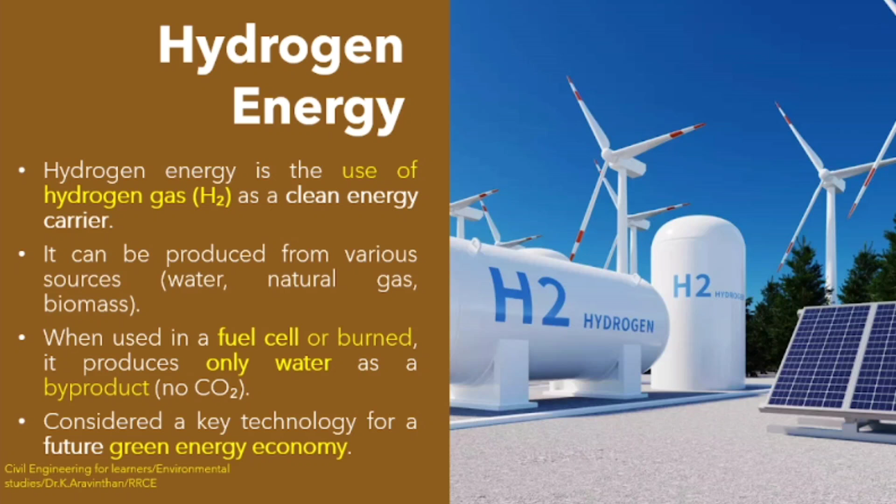From biomass also you can derive hydrogen. So you get hydrogen from water, from natural gas. Natural gas consists of methane. Gases are of different types, and methane gas is used for producing heat. Natural gas is derived from coal.

Petrol they derive, isn't it? They derive petrol, diesel, gas from coal. So those are called natural gas, derivatives from crude oil.

Now next thing is from biomass, which is biological waste, organic waste. From this process you can derive hydrogen. If you have diesel, you can run a vehicle, you can generate electricity using diesel generators. The same way, hydrogen is also a fuel. By this you can generate electricity, by this you can run a vehicle.

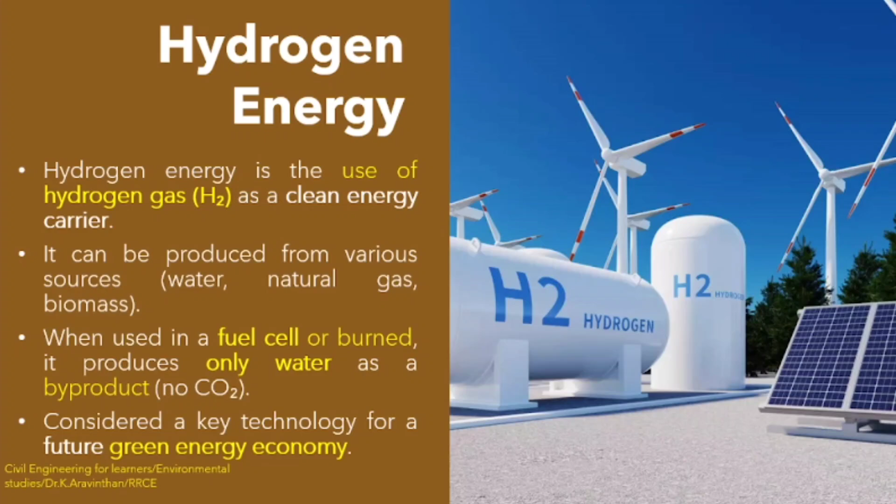Considering this key technology, sir, already we have diesel, we have petrol, we are generating electricity. So why are we going for hydrogen? This is called renewable energy. What is renewable energy? It will not deplete. Imagine diesel and petrol, we depend on coal. Hydrogen is not available readily.

Around you, earth consists of how much percentage of atmospheric components? Nitrogen, oxygen - these are the two things majorly earth consists of. Now if you go into space, what does space consist of? One is hydrogen, another is helium. These are two gases. 99% these two are there, only 1% is rest of the oxygen or matter, etc.

Universe completely consists of hydrogen and helium. That is why I am discussing hydrogen - this is abundantly available. Sun is burnt by using hydrogen energy, it converts hydrogen into helium. That is the process happening. Daily we are getting sunlight and heat due to that process. So hydrogen is abundantly available.

Now in universe, but on earth you don't have hydrogen, you have nitrogen, you have oxygen. You can tap hydrogen by renewable electricity, where you can generate hydrogen using solar panels, using windmills. You can generate electricity, and from that you have a component called electrolyzer. This is a process - there is water here. You have two conductors. If you pass current in this, at one part you will be having oxygen and at another part you will be getting hydrogen.

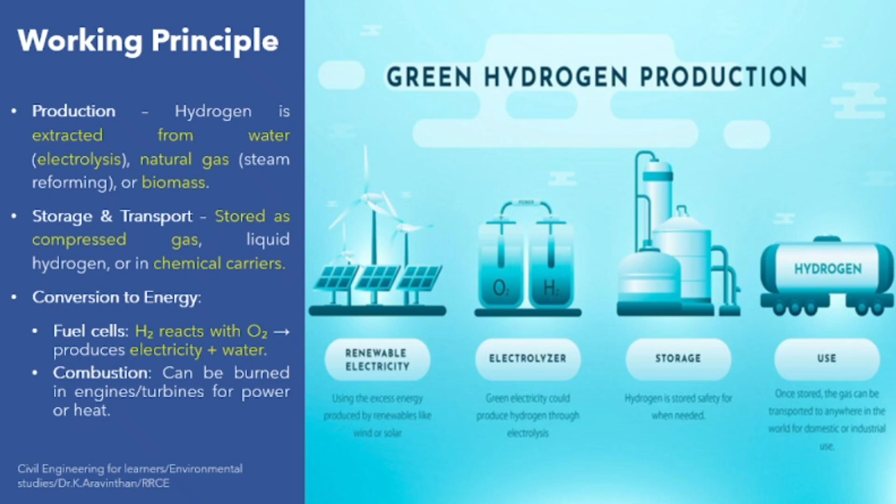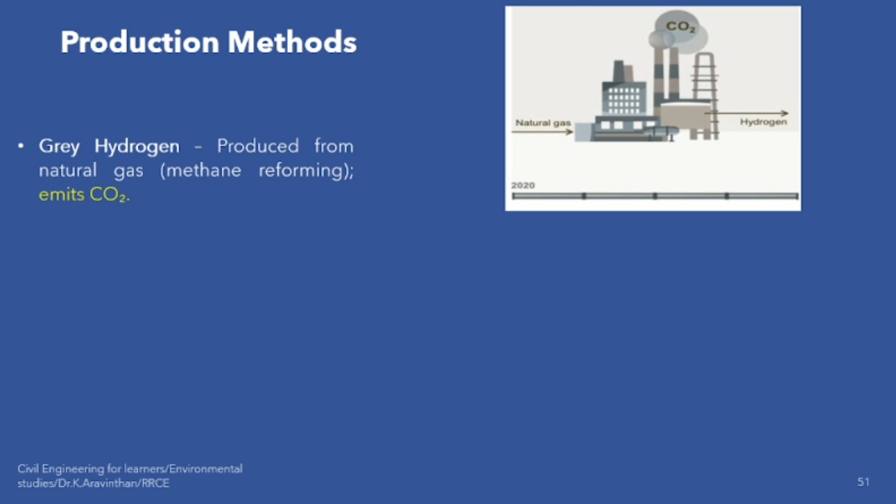Next type of hydrogen is called blue hydrogen. What do you mean by blue hydrogen is, they are similar to grey hydrogen, but what they will do is, while production of this hydrogen, some CO2 gases will emit. Those gases will be stored underground or deep inside the earth.

Next thing is called green hydrogen. What do you mean by green hydrogen is, you are getting it from electrolysis process - what I have told, from water you generate the hydrogen. From that you are generating some hydrogen, that is called green hydrogen. So there are three types of hydrogen.

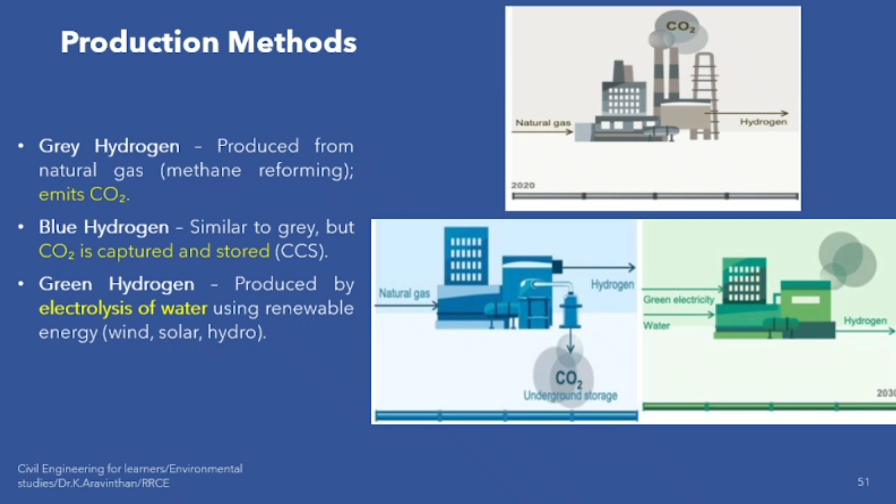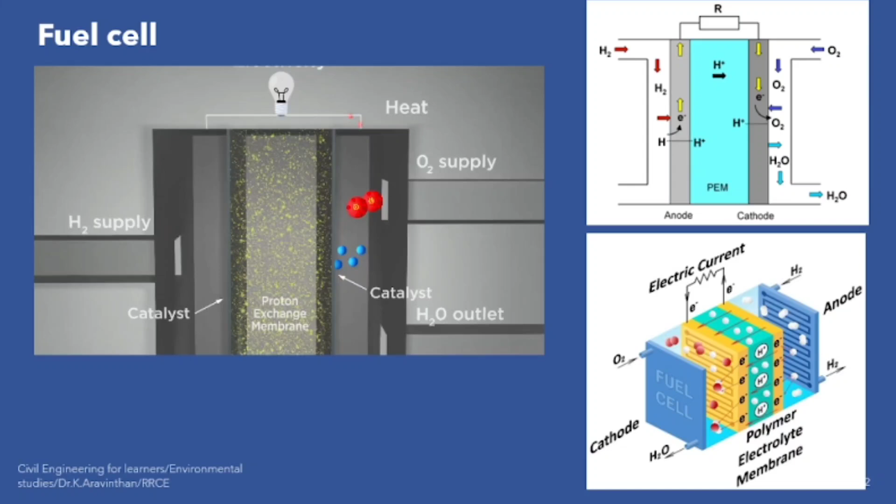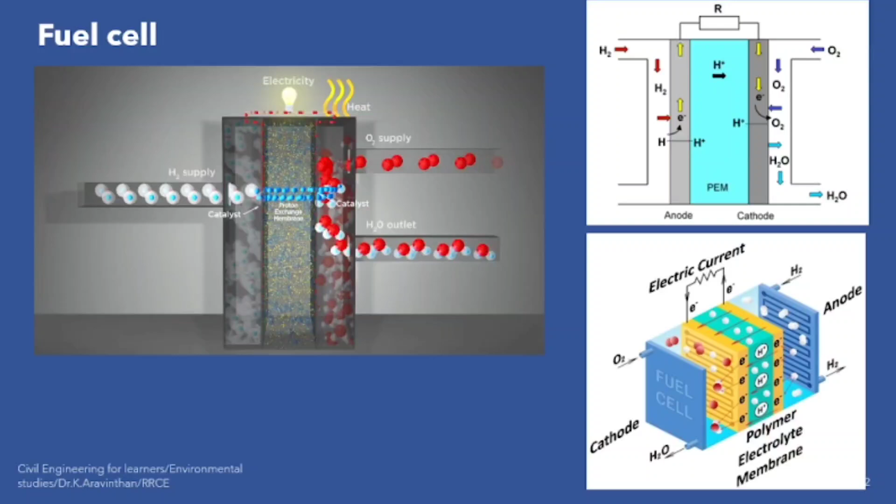This is the technology. They will send the supply of hydrogen here. Hydrogen has protons and electrons, every matter has protons and electrons. Protons will travel here and reach here, while electrons are taken at one side - this is called a fuel cell. Hydrogen is supplied at one side, the electrons are separated and taken as electricity. The hydrogen passes here and oxygen is sent at another side. What happens if hydrogen and oxygen meet? It creates water - H2O, hydrogen and oxygen - so it falls as water.

This process is called a fuel cell. It is a machine - what does it generate? Electricity. The same way, fuel cell is an element which creates electricity. For a generator you need diesel, but for a fuel cell what do you need? Hydrogen. If you have hydrogen you can create electricity. What is the advantage? Why can't I use a normal generator? Why would I want to turn to fuel cell, why would I want to move to it?

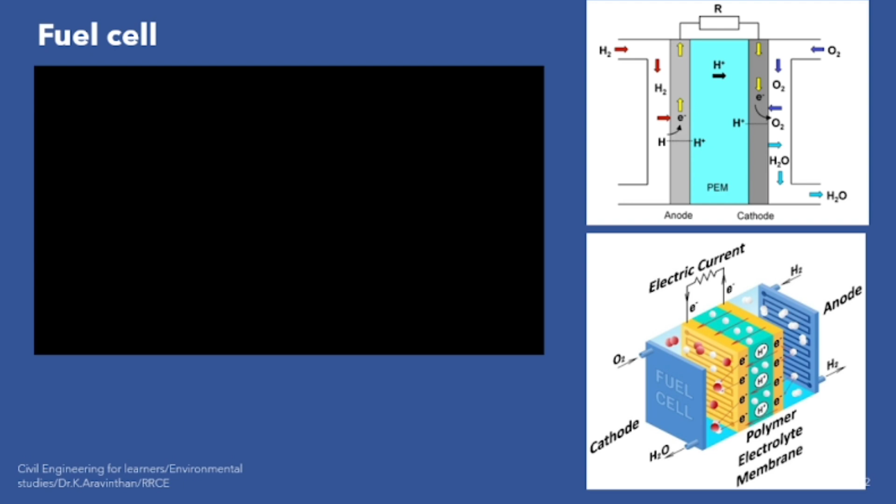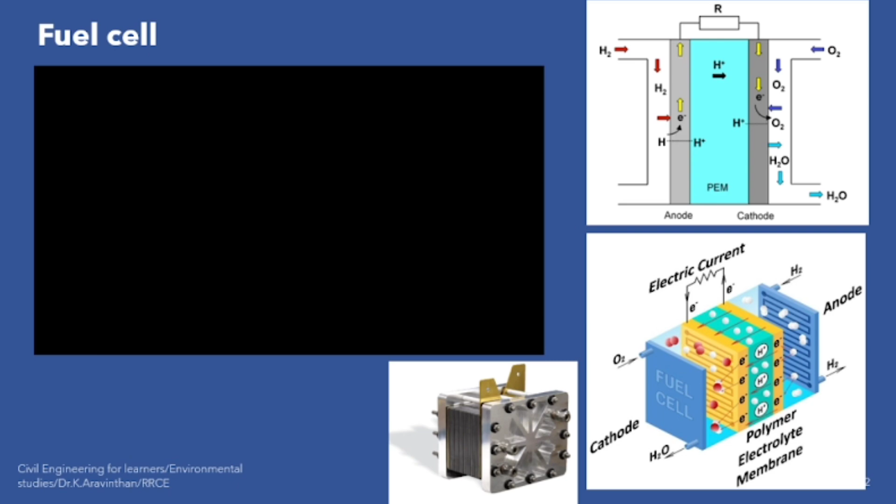Fuel cells will look like this. If you use hydrogen energy, you will not get CO2. Instead of that, what you will get is water. Does it harm the environment? No. Zero emission, zero CO2 emission is called hydrogen. That is why you are studying here - this is called renewable energy.

Earth consists of two main elements - nitrogen and oxygen. And in the universe, as I have told you, hydrogen and helium consist of nearly 99%. These are the merits of hydrogen, which is called clean fuel. Why they call hydrogen clean fuel is because during generation of electricity, you don't have any CO2, no gases, only water vapor or water you will get. That is the advantage.

Next is abundant availability. Do we have abundant water? More water is available on earth. You can extract hydrogen from water, biomass and natural gas, and by this you can extract high energy density. The advantage of hydrogen is, if you have 1 kg of hydrogen, it consists of 3 times more energy than diesel or petrol. That means if you buy 1 liter petrol, your mileage is 50 kilometers. If you run the same vehicle on hydrogen, you get 150 kilometers for 1 liter - 3 times more energy.

So that is why there is an advantage in shifting to hydrogen energy - versatile use. For what purpose can you use it - transportation. Electrical cars, e-vehicles, do you have a hydrogen car? Toyota is launching a hydrogen car for commercial purpose. In 2023, Nitin Gadkari, the Highway Minister, Ministry of Highways and Transportation, launched hydrogen cars, though not yet for commercial use. Toyota in India is going to launch a new hydrogen vehicle.

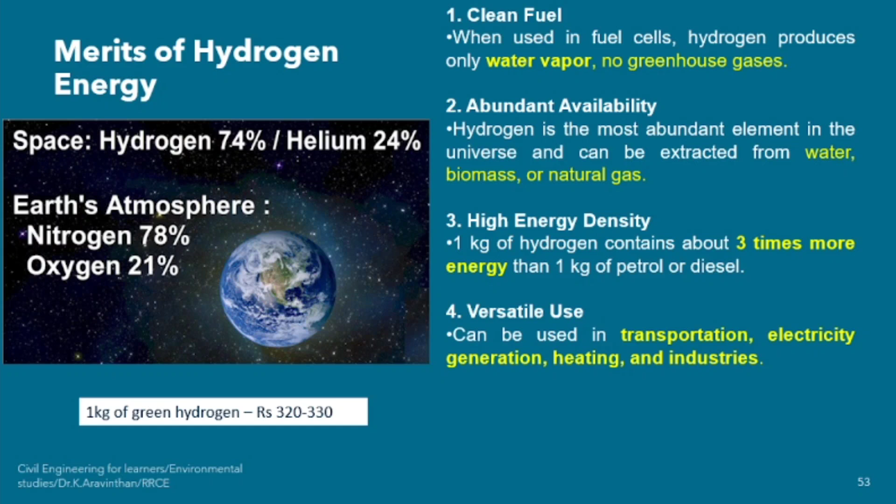1 kg of green hydrogen costs 320 to 330 rupees. Can you see the disadvantage? What is the price of 1 liter diesel? Nearly 100 rupees. 1 liter petrol is also nearly 100 rupees. Hydrogen price is 320 rupees - so this is the disadvantage. Anyhow, energy storage medium is an advantage here.

Decarbonizing of industries - where can you use this? We are manufacturing steel, copper, aluminium, etc. When they manufacture something, they have to boil it in a furnace, they have to melt it, and during melting they are using a non-renewable process. When manufacturing steel, cement and fertilizers, if you want to manufacture steel, around 1000 degree centigrade is needed. How iron converts into steel is by burning. Currently, what are they burning? They are using coal. Instead of coal, can you use hydrogen? Yes, that is called decarbonizing.

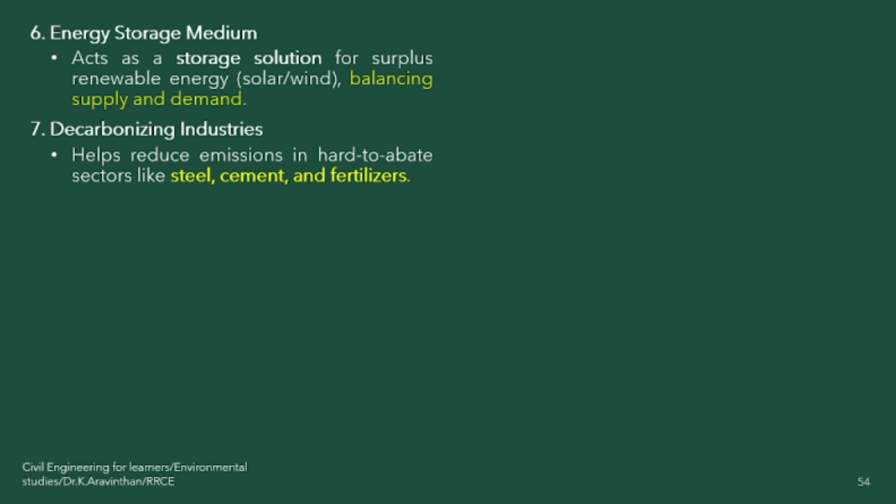All the cement industry and steel industry have to change their process by using hydrogen. That process is called decarbonizing of industry, and fertilizer industry too can use it to manufacture products. If we are consuming steel, say you are buying a vehicle, for manufacturing your bike, CO2 is emitted into the environment. So industries are changing their process - that is called decarbonizing the industry.

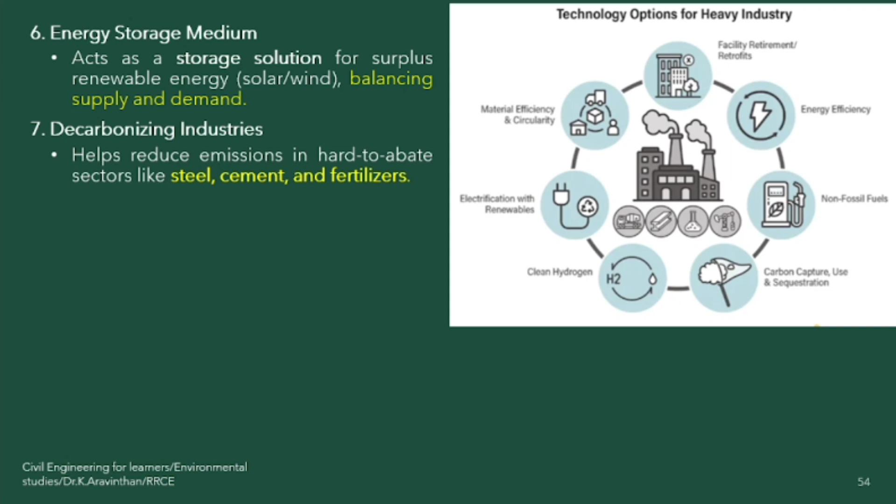For what purpose have I highlighted this - a silent and efficient operation. Like e-vehicles, when you are driving two-wheelers or four-wheelers electrically, you will not have any sound, it will be very smooth. The same way, hydrogen also provides silent and efficient operation than combustion engines.

You will not find more sound when you are being operated with hydrogen. There are three things here: internal combustion, battery, and fuel cell.

If I input 1 kg of hydrogen, I will get half of the electricity, half will get lost. That is called efficiency. If you are using fuel cell, only 50% electricity.

If you are using lithium ion battery, if you are supplying 1 kilowatt of power, 15% of power will be lost due to capacity of battery. Battery has inefficiency. Internal combustion engine, if you are supplying diesel, those engines have 80% loss, only 20% is combustion.

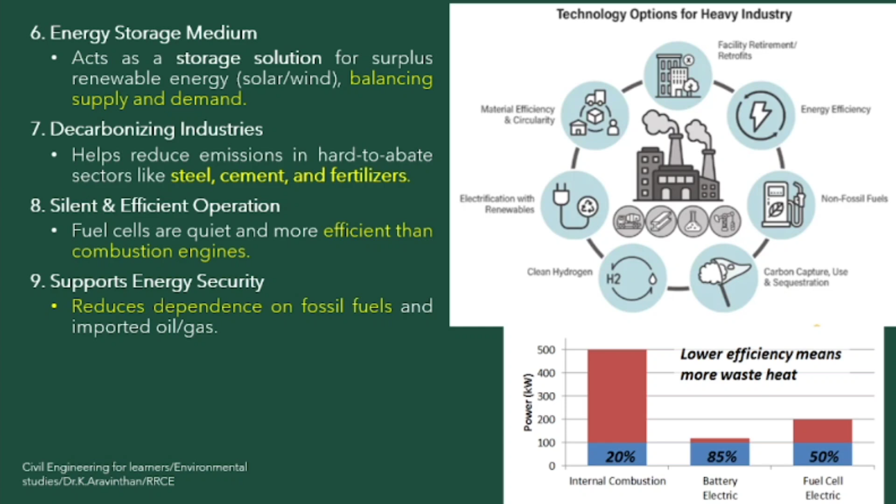Fuel cell has more efficiency than diesel. That is the advantage of hydrogen energy. It supports security and future mobility. You can use it for future purposes.

Demerits. So far I have discussed the merits. Production cost is so high for generating. Electricity cost is 440 to 480 rupees per kg.

Sir, I want to generate 1 kg of hydrogen, which gives mileage of 3 times. But how much cost should I spend? You have to spend 440 to 480 rupees for 1 kg of hydrogen. That is why it is costly.

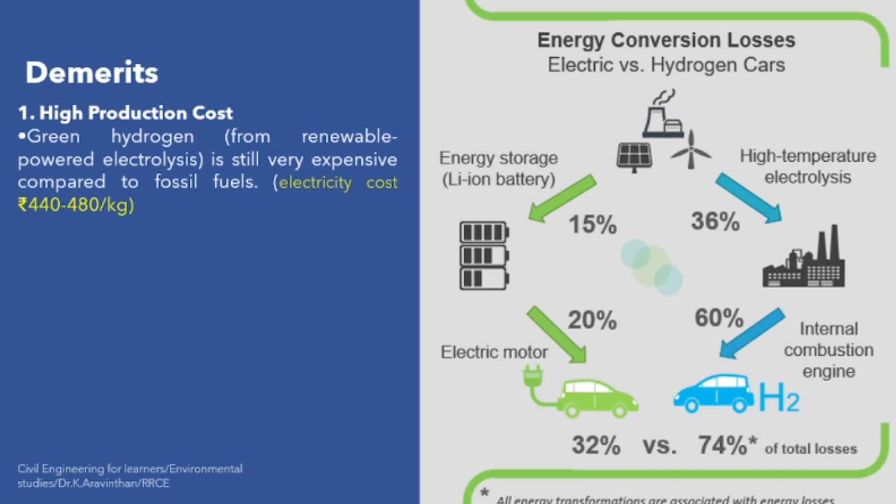We have to bring it down. As an engineer, we have to invent a technology. We have a bright future scope, no need to pollute the environment or change the ecosystem. But we are not having enough technology. We know hydrogen helps humans and the ecosystem, but current technology doesn't help well. 440 or 480 rupees per kg is the energy loss in conversion.

This image shows how hydrogen is derived from solar power plants and wind power plants. From here you generate electricity and store it in a battery. From the battery you use it for running the vehicle. This is one process: how you are using an e-vehicle, by using the energy generation.

How much loss is there from the power plant to battery? 15% loss is there. From battery to the vehicle, 20% loss. So totally how much percentage? 32% of loss.

But when you are using hydrogen energy, the electrolysis process has high loss, 36% is lost. And from that, internal combustion by hydrogen is 60% lost. So nearly 74% is lost due to the operation of hydrogen energy. That is the disadvantage, there is more loss.

Storage challenges are there. Sir, can we store hydrogen easily? No. Hydrogen can be stored only in high pressure containers. Why? What is the atomic number of hydrogen? It is 1, it is very, very light.

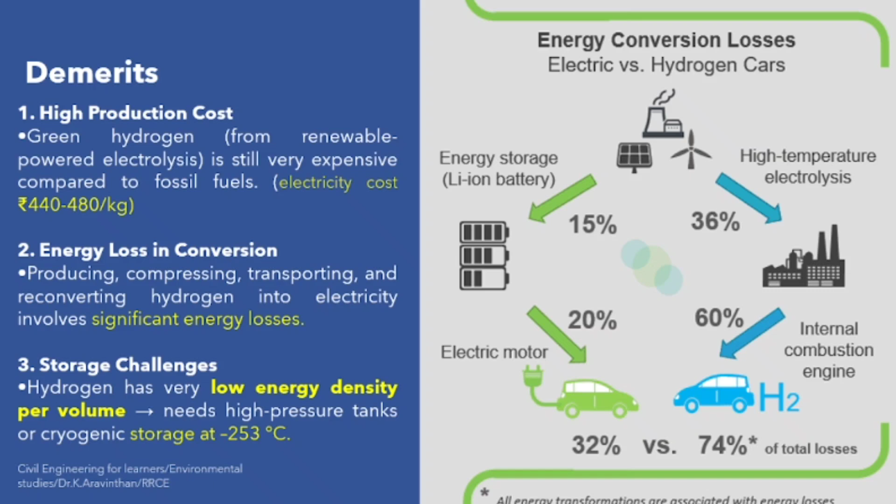Atomic number of steel is high. The purpose of atomic number is, the more the atomic number, the more the weight. Hydrogen has 1 atomic number, that is why it is very light. If you want to store it, you need a high pressure container, with very low energy density per volume. You have to store it at minus 253 degrees centigrade.

Next is infrastructure gap. Currently, no country has full-fledged operation. There is an infrastructure gap for pipelines. If you want to use hydrogen, new pipes have to be installed. Can we install it in the normal pipes we are currently using? Not possible, because it has different technology.

Refueling stations have to be installed. Storage facilities are needed, you cannot supply it at a petrol bunk. Sir, where to supply the hydrogen? You have to supply it from separate stations, not normal petrol bunks. So lack of that is there.

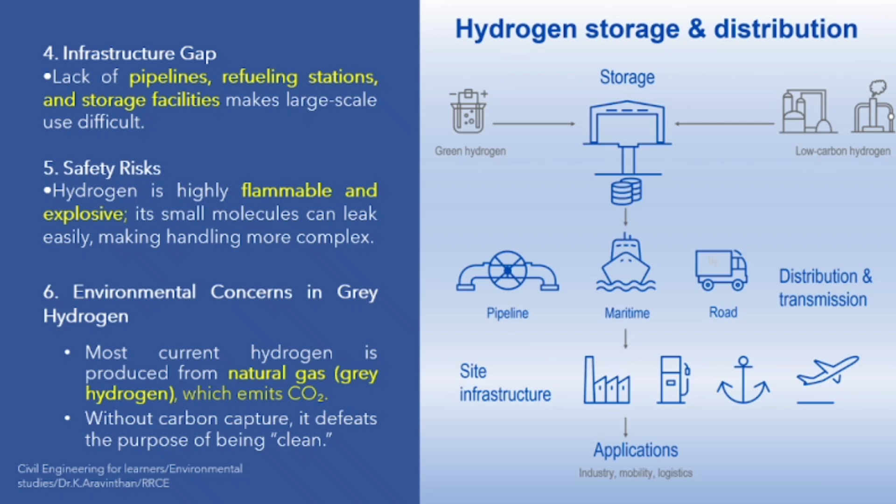Safety risk, because it is highly flammable. And grey hydrogen emits more CO2. Last slide: technological immaturity. Still, this is in an early stage.

In 2023 only, India has launched the Green Hydrogen Mission 2023, where they launched the first hydrogen vehicle. Last year only they have started. So we are in an early stage. In future, we have to go through this.

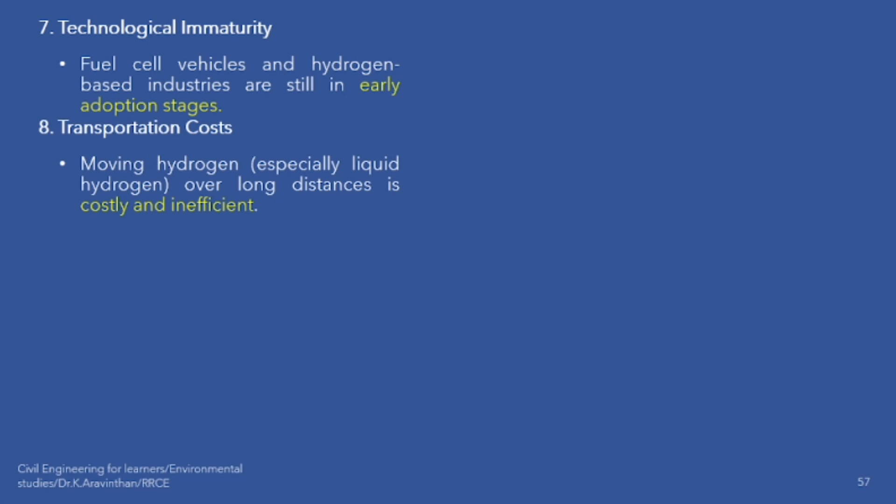Transportation cost is very high, you need a separate vehicle for this. Hydrogen fuel vehicle cost is 62 lakh rupees in INR. If you want to buy a hydrogen car, the price is 62 lakhs. But compare the normal petrol or diesel car, starting price of an SUV will be 8 lakhs. Hydrogen car costs 62 lakhs with current technology. Engineers have to invent better technology here. But what will be the mileage?

Mileage range will be 320 to 400 kilometers, and you will not get the same mileage here - that's only for a full tank. That is the disadvantage. And the electric vehicle is 21 lakh. Can you see the difference? So this is the disadvantage.

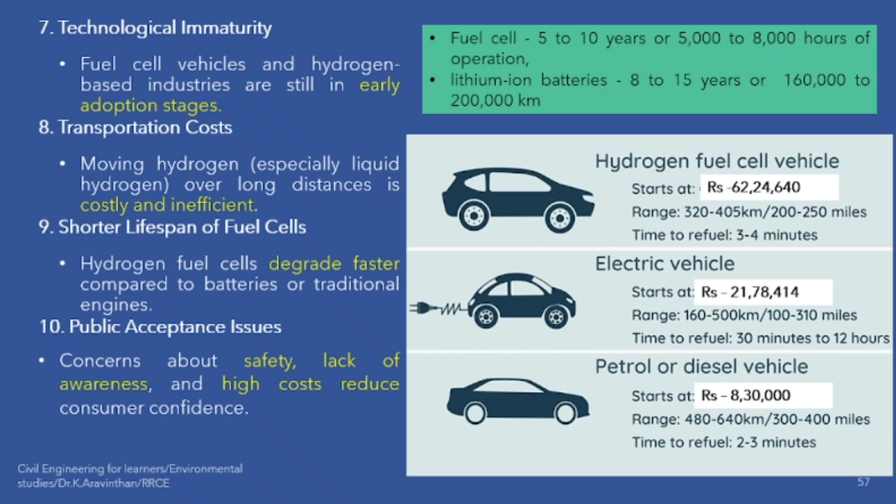Fuel cells also have a lifespan of 5 to 10 years. What is a fuel cell? I told you they generate electricity. If you buy a new fuel cell, it will only last 5 years, then you have to buy a new one. But lithium ion batteries last 8 to 15 years, they are saying. So lithium ion batteries have a much longer lifespan. Fuel cells also have to be improved.

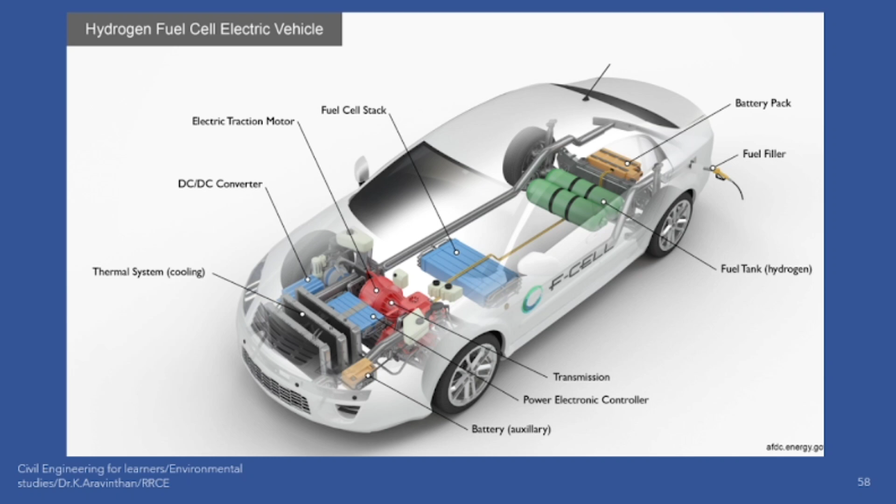Now this will give you a new idea, sir, of how the hydrogen vehicle will run. You will be having a fuel tank, from there they supply hydrogen. This hydrogen will be stored here. From the hydrogen in the car, they will provide a fuel cell - a fuel cell stack will be there, and they will be providing it here. The hydrogen will supply here, they generate electricity. This electricity will be stored in batteries, and from the batteries the car can run. Can you understand this concept? This is the fuel cell concept of the car.

Which country has more hydrogen? China. 1% of low emission hydrogen is currently available on Earth - a 2.5% increase. This graph is available here.

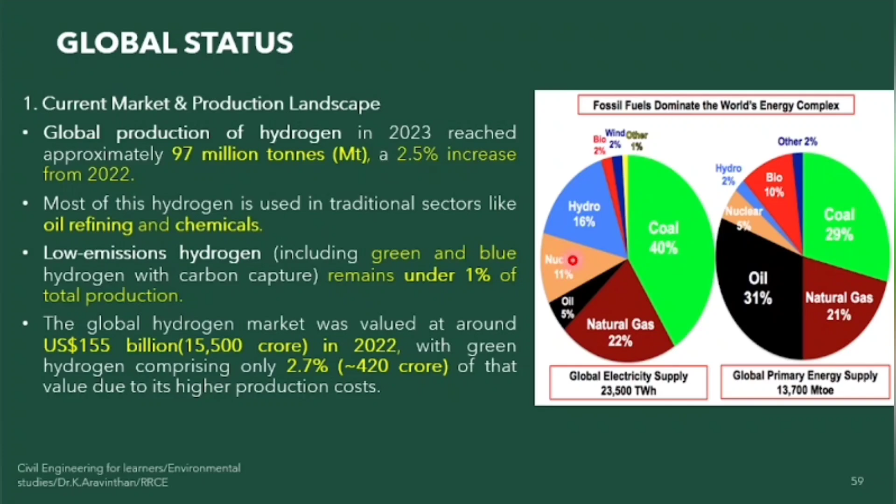Currently we are not using any hydrogen for generating or manufacturing. We are only using natural gas, coal, nuclear power plants, etc. This process has to start and initiate.

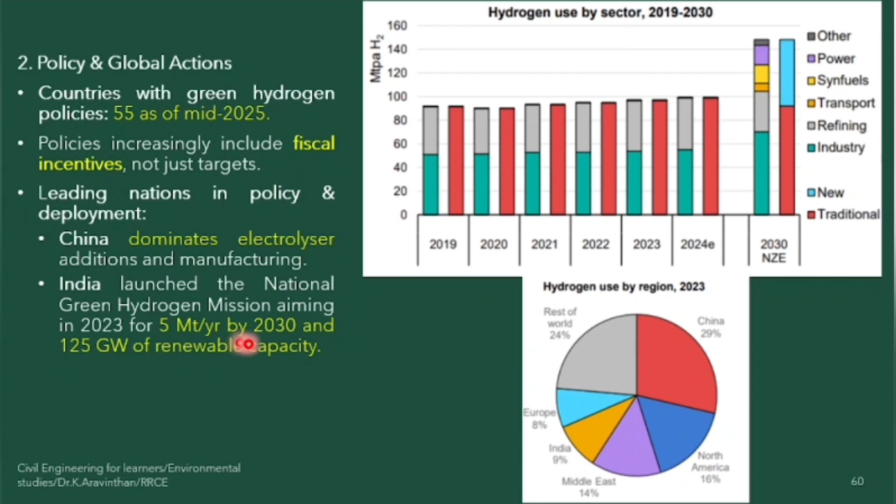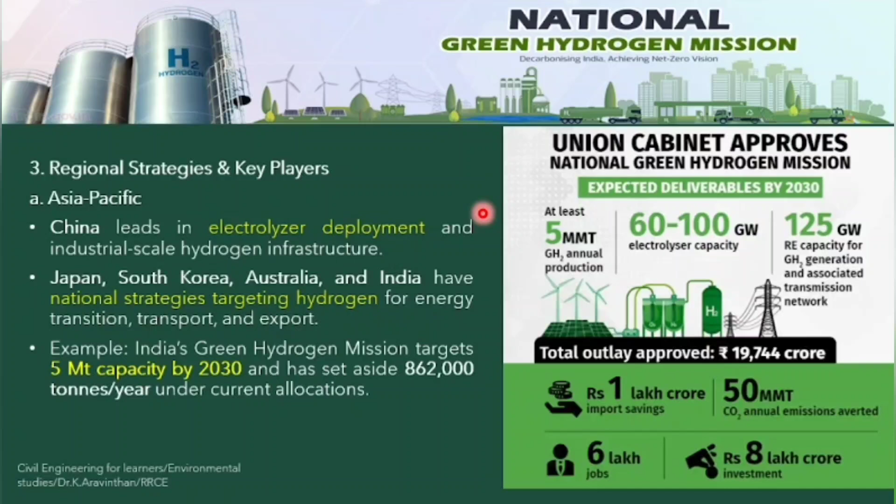They are interested. So this is the Green Hydrogen Mission of India, which I have told you when it started - 2023. They have a target of getting hydrogen to 5 million tons of capacity by 2030. This is the target of India. Now other countries, currently all the countries are wanting to increase.

When we are coming to application, for what purpose can we use it? Sir, if I have hydrogen, imagine you have 1 kg of hydrogen - is anybody going to get it from you? Nobody will come and get it. Why? Because you don't have applications. In future, you might get applications for home, office and grid supply, and they can be a backup for the power system. What do you mean by that is power plant.

Imagine you are having a windmill. That windmill is generating electricity. You have a battery - what will happen if your battery is completely filled? The windmill keeps on rotating, all the energy will be lost. You have to increase your battery. So what you can do instead of increasing the battery is provide an electrolyzer - that means all the wind energy will be converted to hydrogen and you can store it.

Imagine if you are storing in a battery - I hope everyone has a vehicle. You put your vehicle off, switch off for 6 months, you cannot start your vehicle. Why? The battery will completely drain. After the battery drains, you cannot start it. If you leave the battery, automatically it is a chemical process, it will happen. So, if you store in hydrogen, you can keep it for unlimited years. That is why you can use hydrogen as a backup for battery.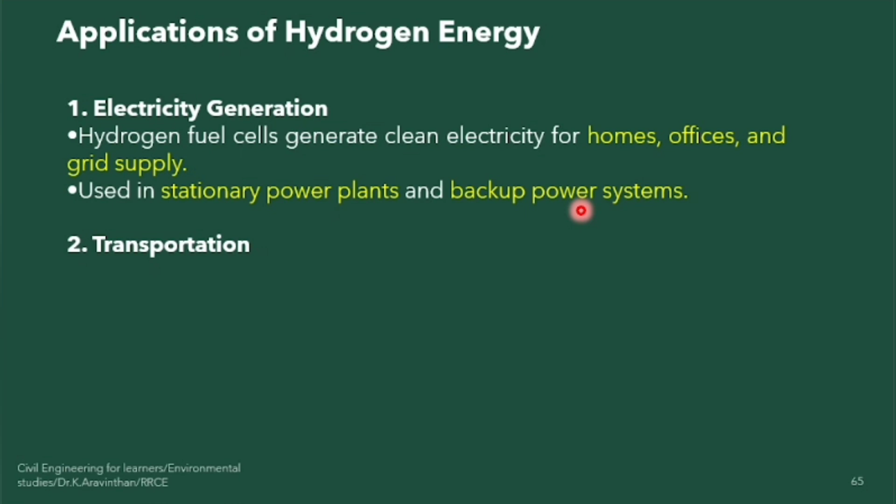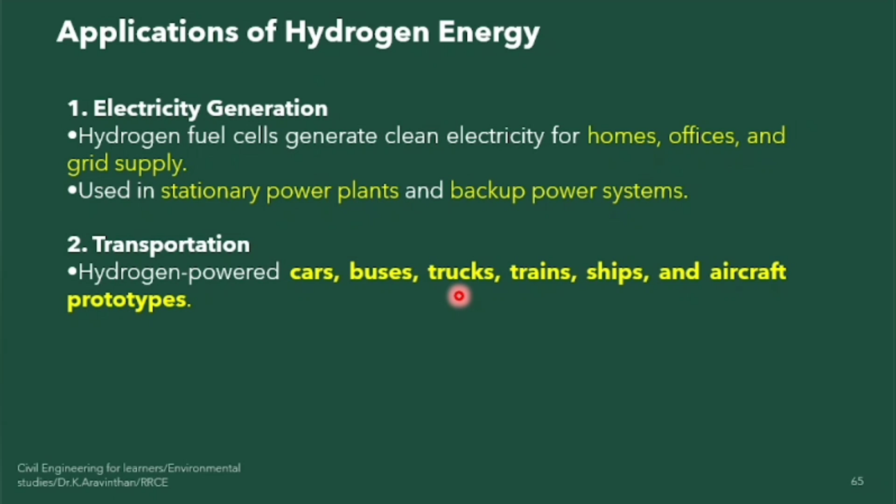So, before battery and electricity, hydrogen can supply transportation. All cars, buses, trains, etc. can be run by hydrogen. That is one of the advantages or applications of using fuel cells.

Now, I have told you this car model is going to get launched - the Toyota Mirai. Ex-showroom price will be 60 lakh rupees. If you put 1 kg of hydrogen in this vehicle, what will be the mileage? You will get 125 kilometers. Currently, do you have any car giving 125 kilometers of mileage? Not at all possible. Toyota Mirai will give this mileage with zero CO2. Generally, 18 to 24 will be the car mileage, and you will get 125 kilometers as mileage with this kind of vehicle.

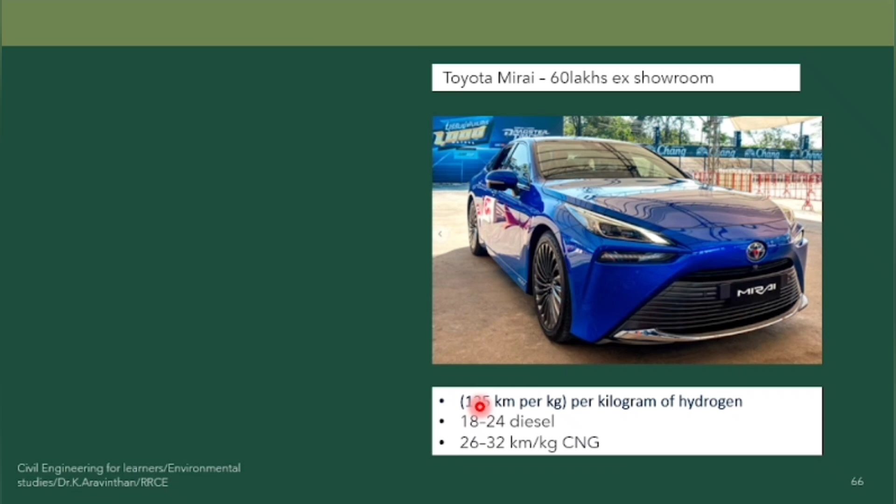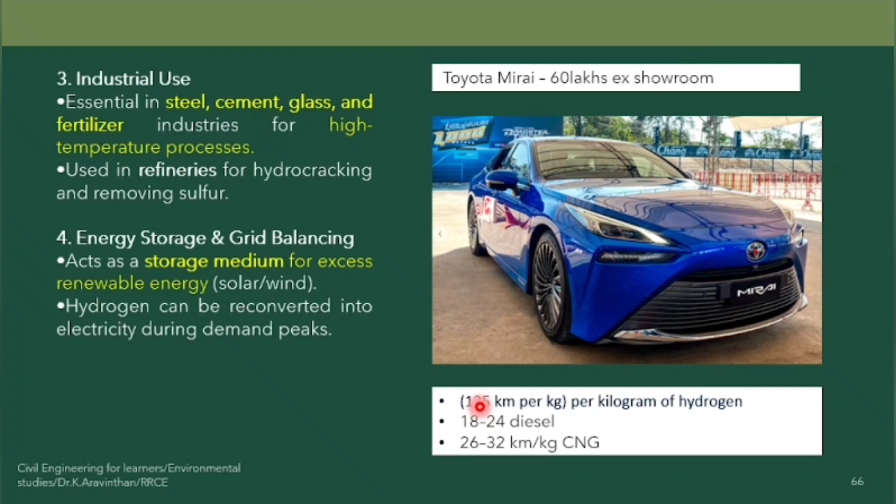Now, industries can use hydrogen for steel, cement and glass manufacturing. They can use it for boilers and heating purposes. Next thing - as I've told you already, all the windmills can store hydrogen in form of gas. You can use it for residential and commercial heating purposes. That is called combined heat and power.

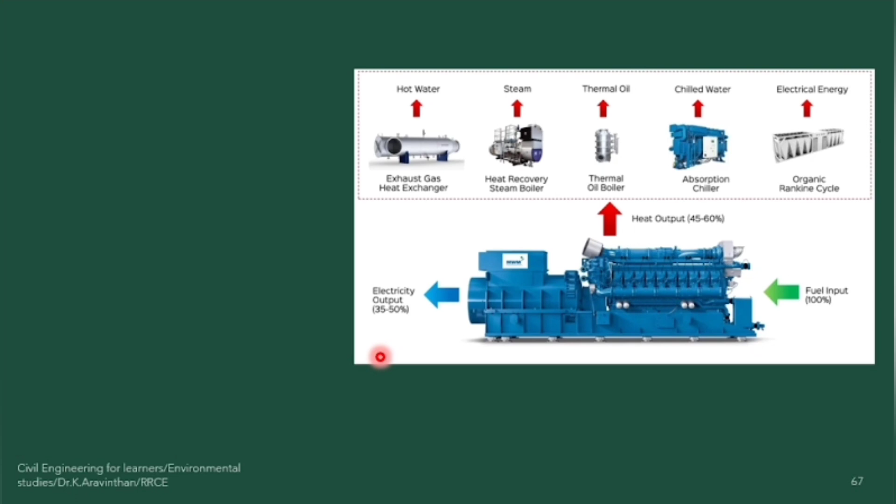This is a machine which is available, called combined heat and power. What does this equipment do? If you input hydrogen at one side, it generates 50% heat and 50% electricity. Imagine if you are running an industry with this machine - 50% creates heat, which can be used for heating water, steam, etc. for all purposes. The rest 50% it will generate as electricity and it can supply. Like this, you can make all industries run by a decarbonizing technique.

Currently, drones are being used for flying purposes. Have you seen drones used for underwater marine purposes? Drones can be used, and currently drones are used for marine purposes also. If you want to travel in marine, currently you have ships and boats, but Australia today has launched drones - marine drones, portable devices, drones for telecommunication etc. For military purposes also you can use them.

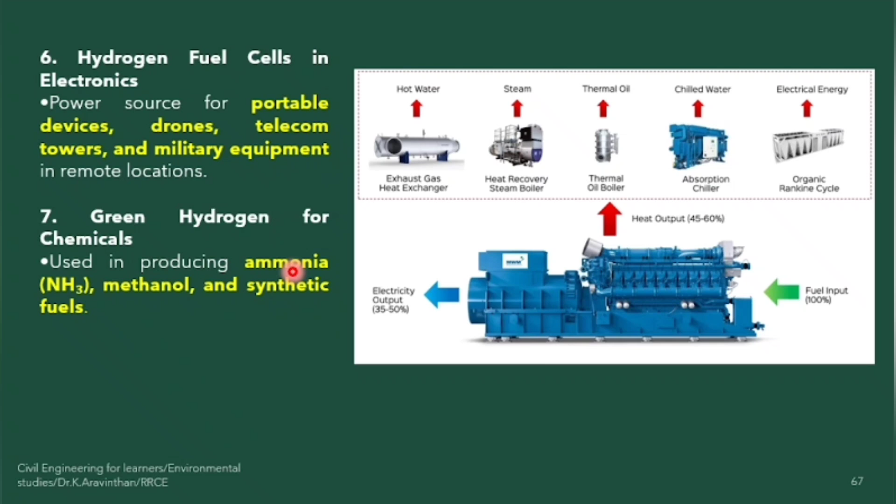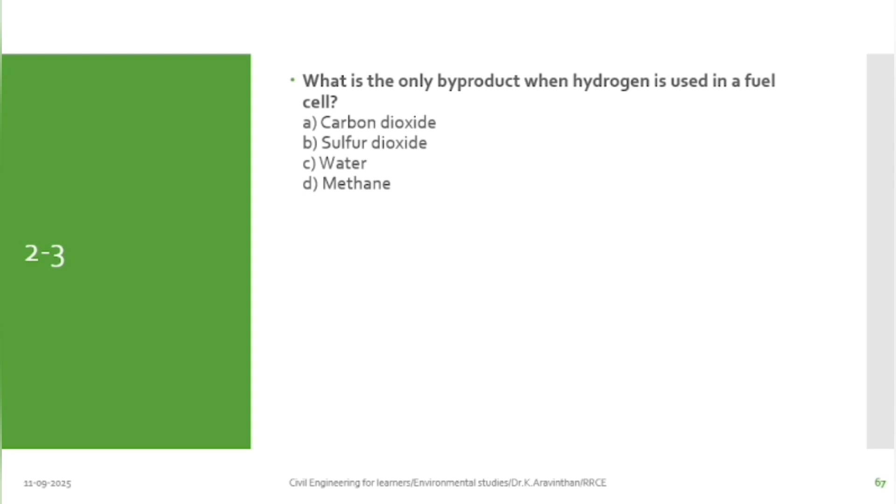And from green hydrogen you can manufacture ammonia - this is a raw material. You can manufacture ammonia, methanol, etc. And for space exploration - what is the only byproduct when hydrogen is used as fuel? Water. You get only water.

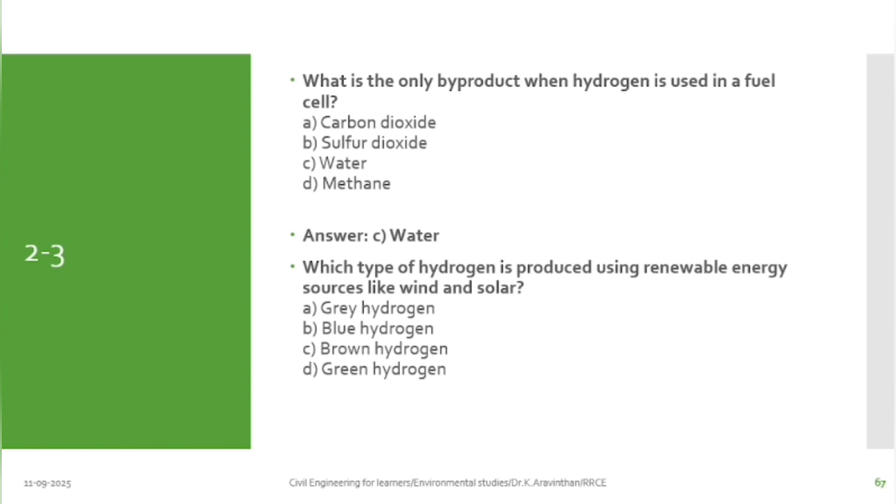Next thing - which type of hydrogen is produced when using renewable energy sources like wind and solar? Three types of hydrogen I told you. You get green hydrogen.

The energy density of hydrogen compared to gasoline is how many times higher? 3 times higher.

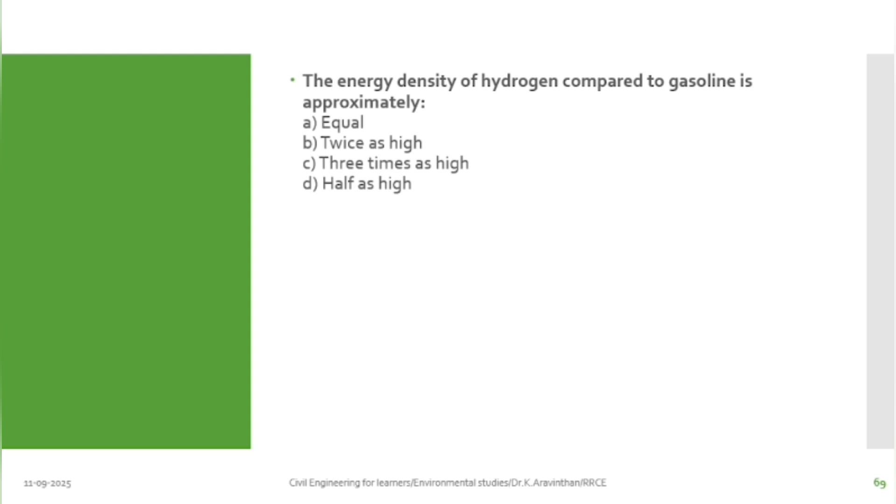Which of the following sectors can use hydrogen as a clean alternative fuel? Any industry can use it.

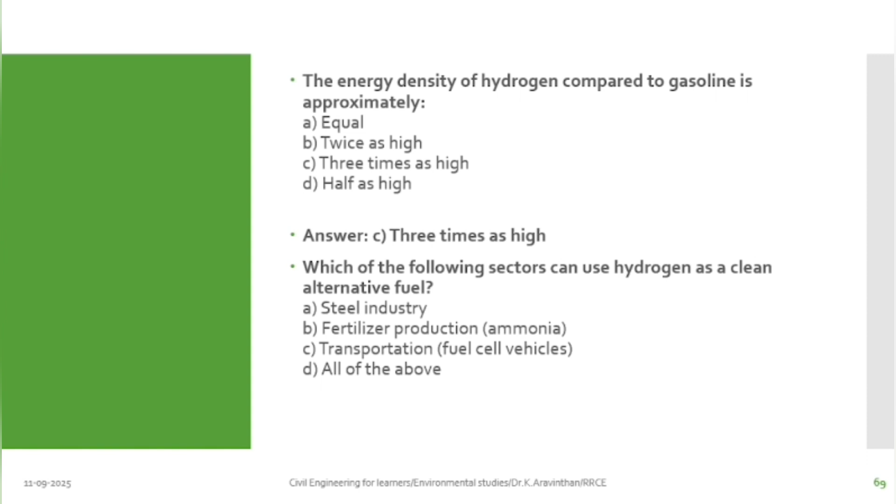Next thing - in fuel cells, hydrogen reacts with which element to produce electricity? It needs oxygen. Hydrogen plus oxygen becomes water. It needs oxygen.

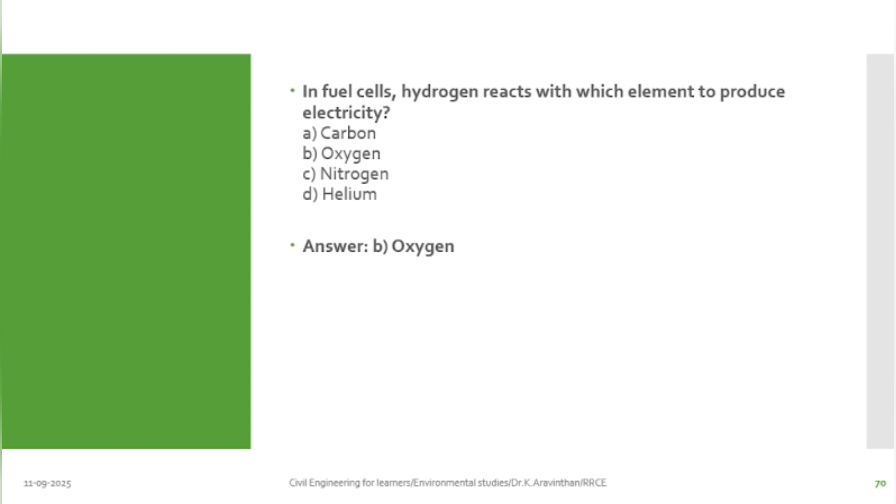Which process is commonly used to produce green hydrogen? Electrolysis - yes, of water.

Which property makes hydrogen suitable for use in fuel cells for vehicles? Silent operation and zero tailpipe emission. That is why we are going for it.

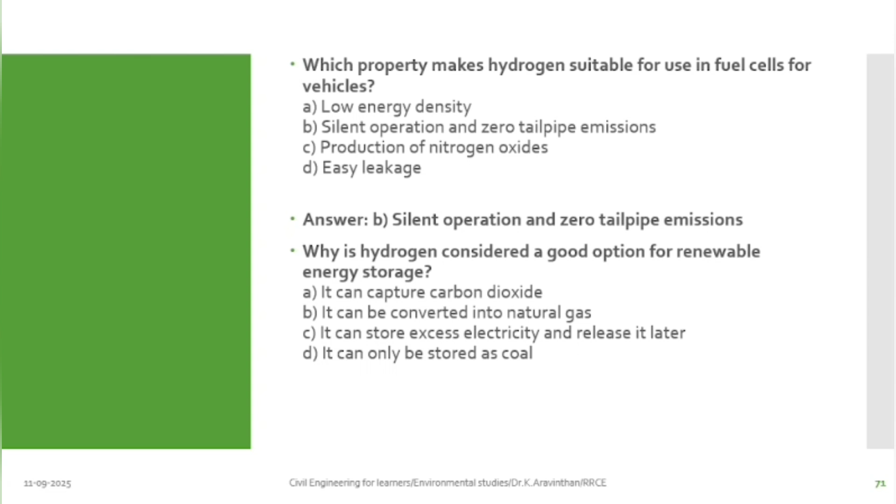Why is hydrogen considered a good option for renewable energy storage? It can store excess electricity and release it later.

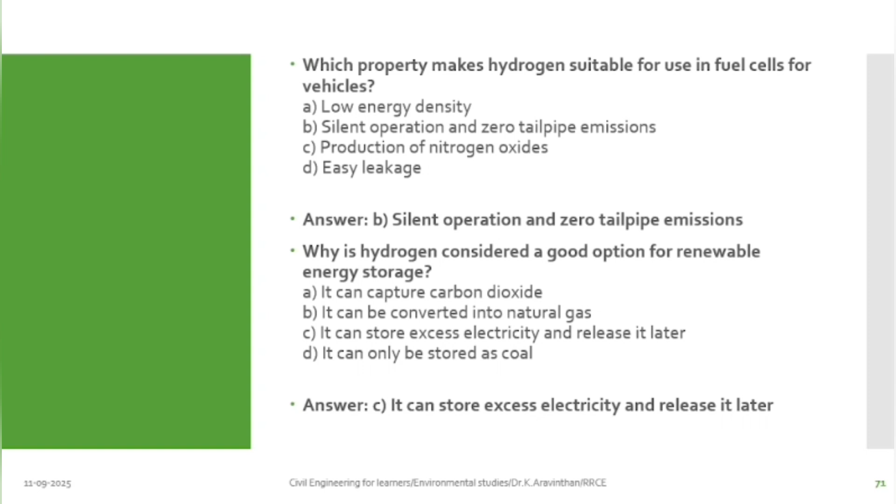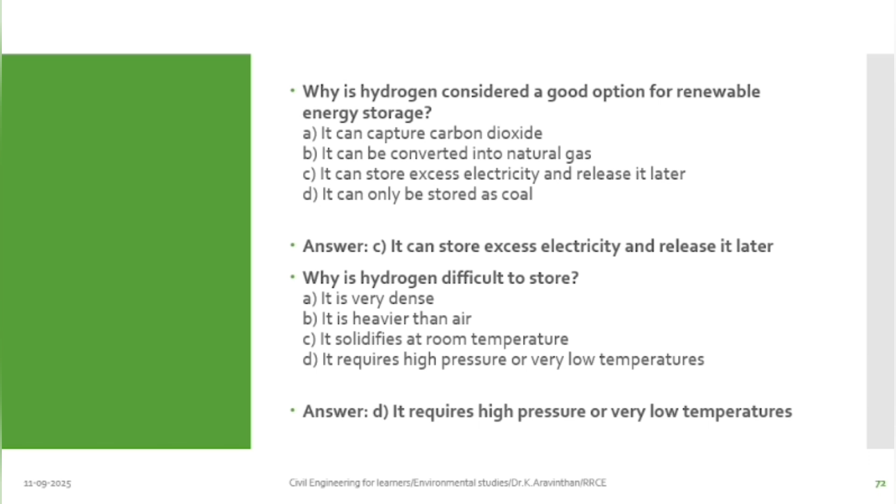Why is hydrogen difficult to store? It requires high pressure or very low temperature. You cannot store it in a natural place. Even your refrigerator has minus 40 degrees - below that you cannot go. But hydrogen needs how many degrees centigrade? minus 253 degrees centigrade is required - only at very low temperature can you store it. If you are not storing it properly, what will happen? It will leak - due to temperature difference, it will automatically leak, since it is very lightweight.

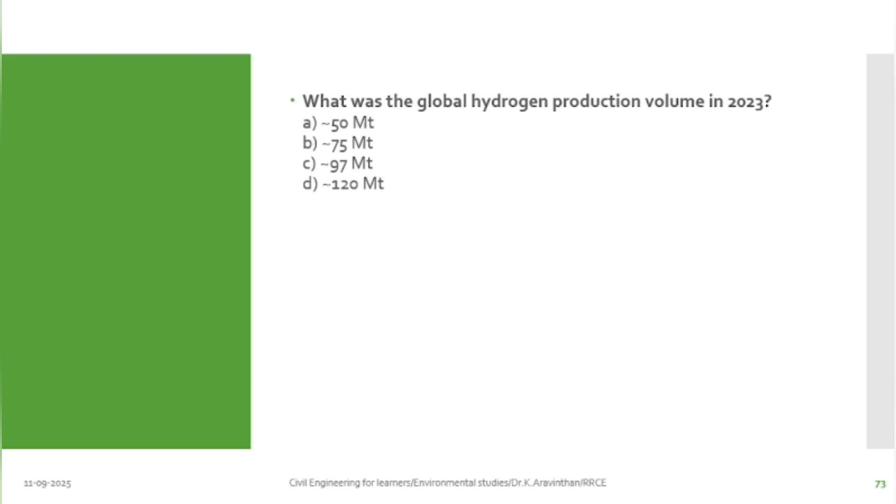What was the global hydrogen production volume till 2023? 97 million tons of hydrogen available till now.

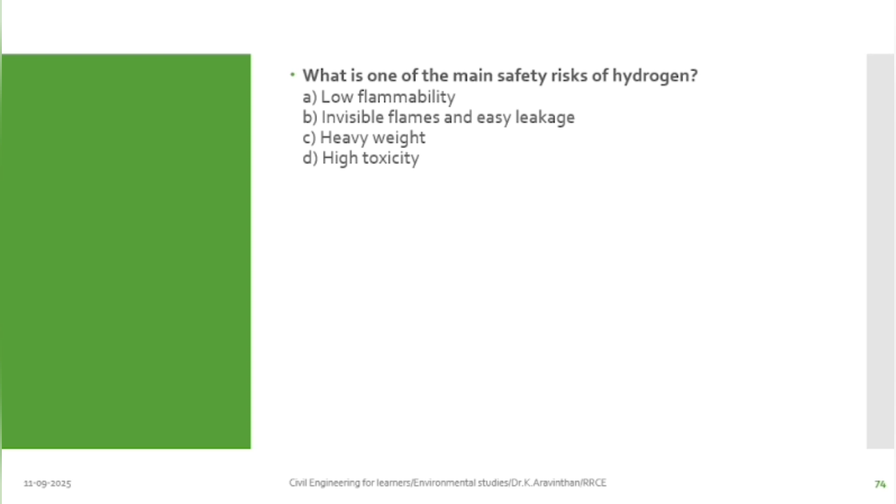Next thing - what is one of the main safety risks of hydrogen? It is invisible - you cannot see it and it can easily leak.

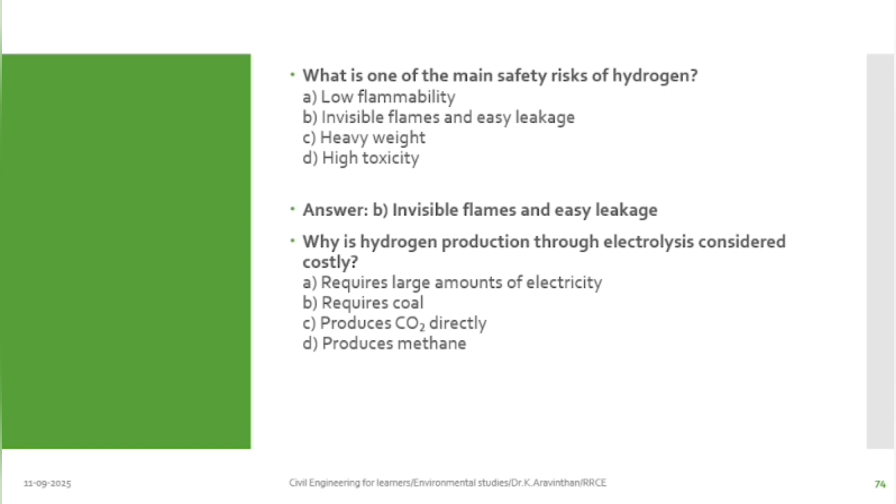Why is hydrogen production through electrolysis considered costly? It requires a large amount of electricity.

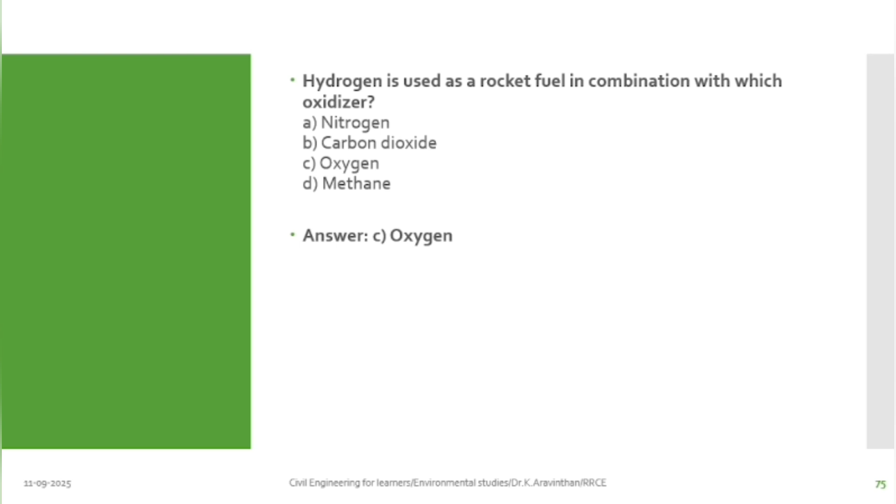Now, hydrogen is used as rocket fuel in combination with which oxidizer? Oxygen is required - hydrogen always requires oxygen in order to be used as fuel.